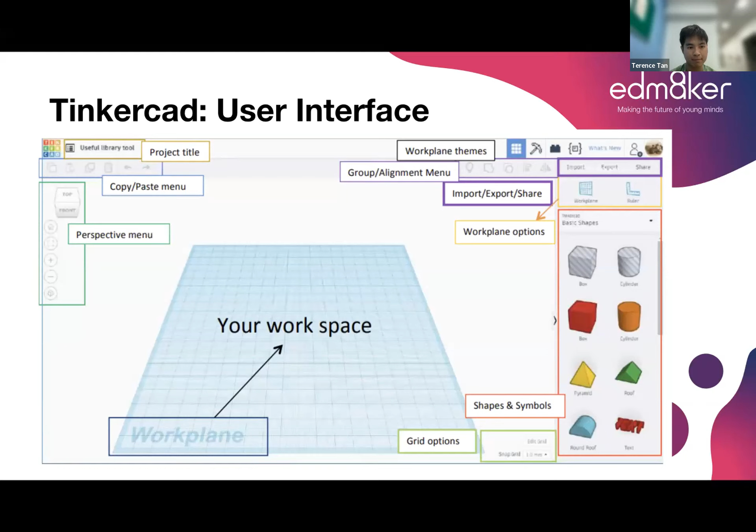Okay, now I'm going to show everyone how to create simple objects in TinkerCAD. ได้เป็นการแสดงเครื่องมือง่ายๆนะครับในการใช้งานนะครับ On the right hand side of the screen, you can see different shapes. I'm going to pull a shape called the box into the screen. ดึงมาเลยครับลากมาวางได้เลยนะครับ

When I pull the box onto the screen, you can see that a box also appears on the work plane. I can zoom into the work plane using my mouse wheel or trackpad if I'm using a laptop. สามารถขยายได้ครับให้มันใหญ่ได้ครับโดยการใช้เมาส์ของเราครับ I'm able to also rotate my view of the plane by pressing Control and then scrolling. กดปุ่ม Control สามารถหมุนได้ครับ ถ้าเรากดปุ่ม Control ครับ

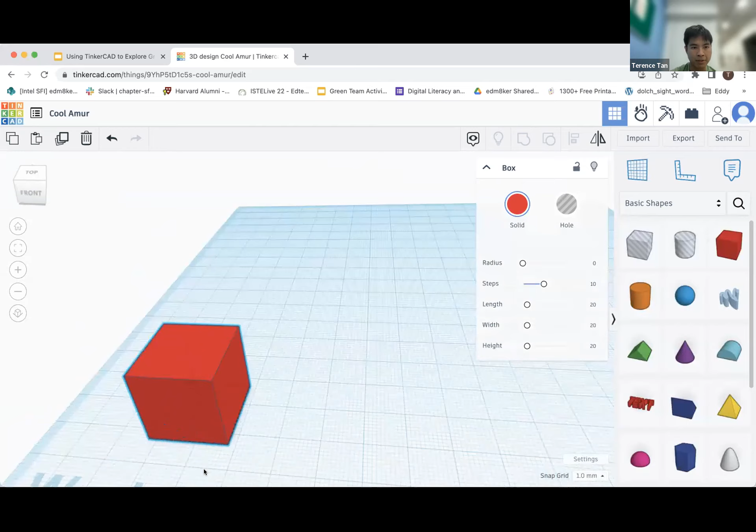Doing so allows me to see the object from different perspectives - from on top, the side, and even the bottom. สามารถเห็นได้หลายมุมมองด้านข้างก็ได้ด้านบนก็ได้นะครับ ดูได้หลายมุมมองเลยครับ This is very important when you're working with three-dimensional objects. อันนี้เป็นสิ่งสำคัญในการดูของ 3D นะครับ

Now I'm going to share how to resize - I call this the 3 R's: resize, rotate, and raise. First, resize. If you see one of these 4 squares, you can grab onto them and change the dimensions. เราสามารถขยายได้เลยนะครับตรงนี้ครับ You can also key in numbers to change the size of the square, for example if I put in 50. หรือว่าใส่หมายเลขไปเลยก็ได้นะครับ ใส่เป็นตัวเลขไปเลยก็ได้

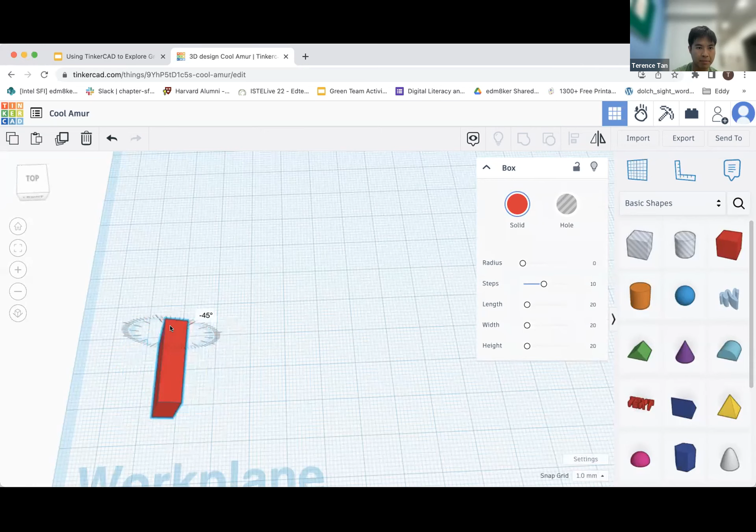Next, rotate. I can rotate the square amongst all axes - I can rotate it this way. สามารถหมุนด้วยก็ได้นะครับ I can also rotate it this way. หมุนเป็นแนวนอนแนวตั้งก็ได้ครับหรือว่าหมุนเป็นวงกลมอย่างเมื่อกี้ก็ได้ครับ Sometimes you may need to rotate your perspective by pressing Control and pivoting before you can rotate or resize the object.

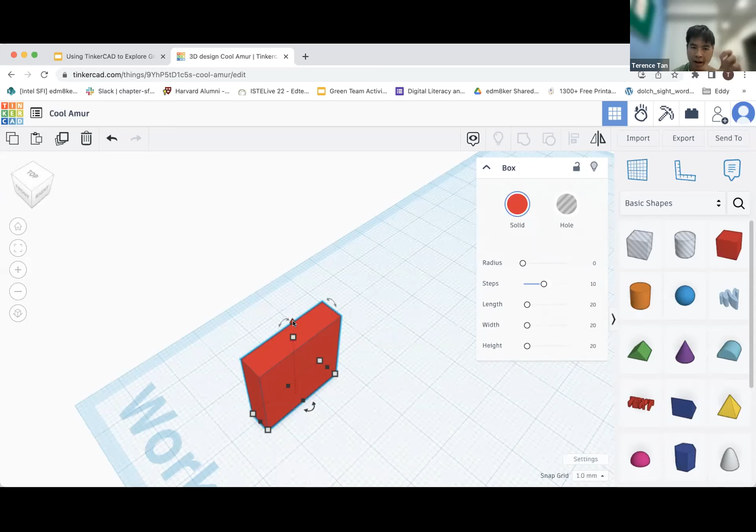I'm going to give everyone a few moments to play around with the 3 R's. Pull a cube, a box, into the workspace and try to rotate, resize, as well as raise. The raising is the last one I haven't mentioned - to raise the object, there's a little cone at the top. You can pull the cone, and this raises or lowers the block from the workspace. ครับตอนนี้อาจารย์ก็จะให้เราดึงตัวกล่องลงมาในพื้นที่ในการทำงานนะครับ แล้วให้เราลองปรับขนาด หมุน ยกขึ้นยกลงที่อาจารย์บอกนะครับ เดี๋ยวอาจารย์ก็จะให้เวลาเราในการทำนะครับ

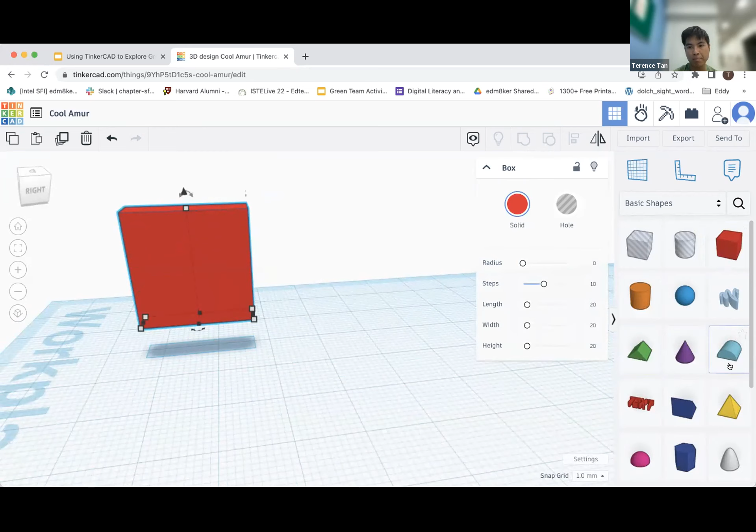Now I'm going to give everyone a few minutes to pull a block onto the workspace. It can be any shape that you choose. Try resizing, rotating, as well as raising the object.

How to know about the size on the tool menu? Oh, tool menu, okay.

You can click one of the corners and it will give you the sizes. Is it centimeters or feet? Currently it's in millimeters, but you can change the dimensions at the bottom over there.

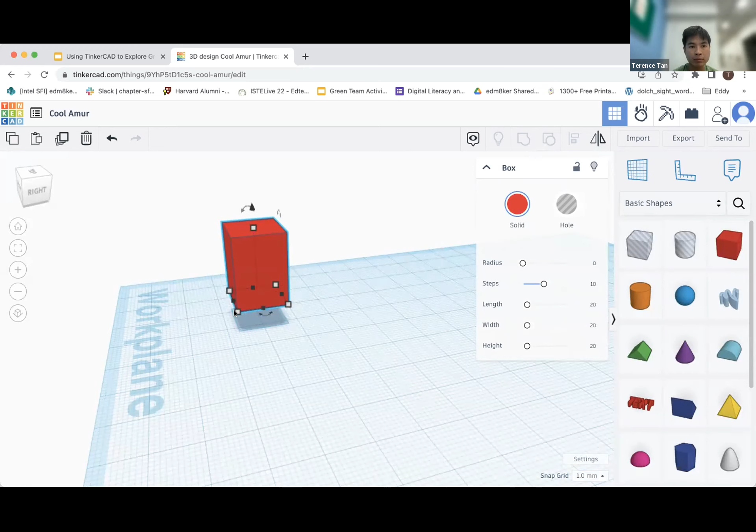Can we randomly select one of the participants to show their work? Maybe we can have a volunteer show their work and how they resize it. We'll give about 3 minutes to share on the screen.

Kru Tong, I'll leave it to you to decide when might be best for people to volunteer. Or do you think they are okay to share now? I think they are okay, I think they are ready. So can we have a volunteer?

I have a volunteer in mind. He is the best participant ever, he joined our workshop every Saturday. Kru, are you ready?

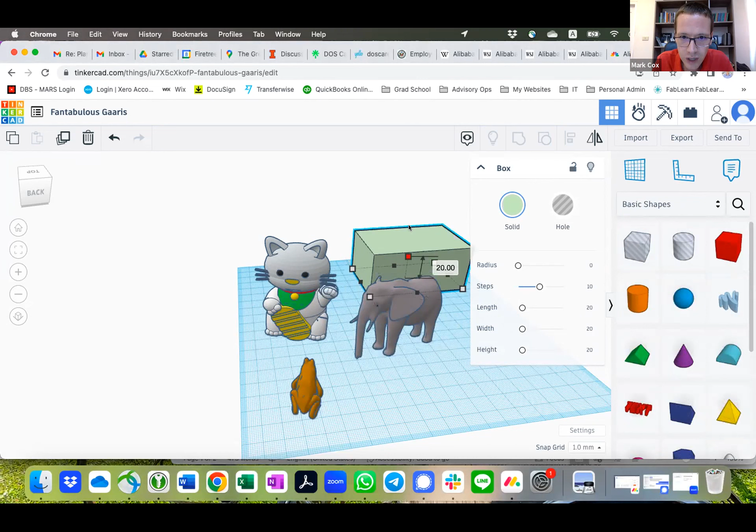So I went to more shapes. I saw over in the corner basic shapes and other things, so I started with this square. I was able to change the shape, make it higher, resize it, move it around, and also change the color.

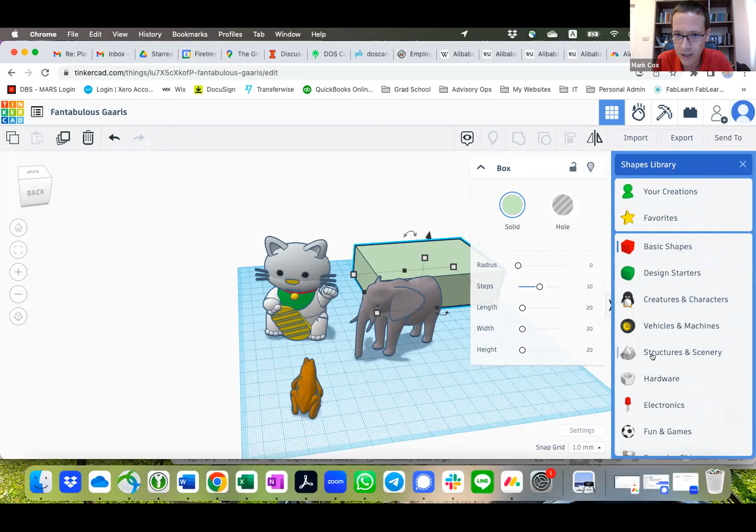I chose an elephant, and it started very, very large when you first choose it. So I changed the shape a little, changed the shape of the cat just to play around. Yeah, so there's my example.

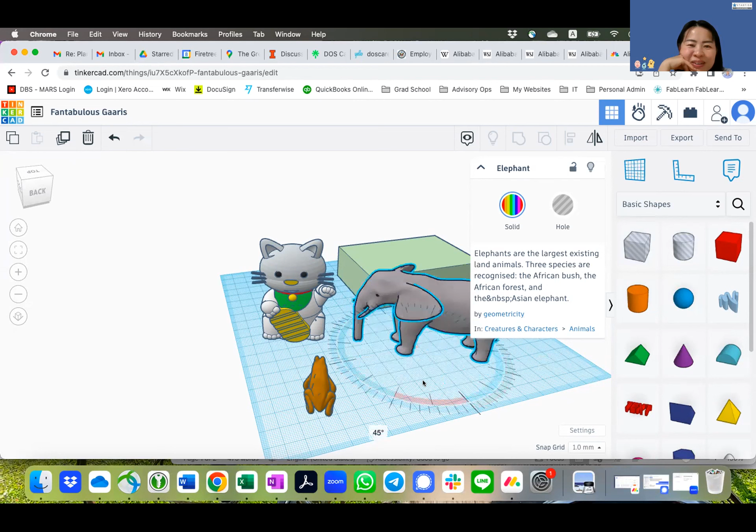Can Mark rotate the object? Can he rotate the elephant? Yes, let me choose—I think you press this little red arrow to rotate it. Wow, exactly. Can Mark lift it up and down?

They wanted to know, can I lift it? Mark clicks the cone, that's right, that's the cone—raise it up. If you click on it, you can lift it, and you can even put it down below the plane for the elephant to go down. Let me rotate or change my perspective... yeah, look at that, now the elephant is below the plane. So that little arrow right there, that makes it lift.

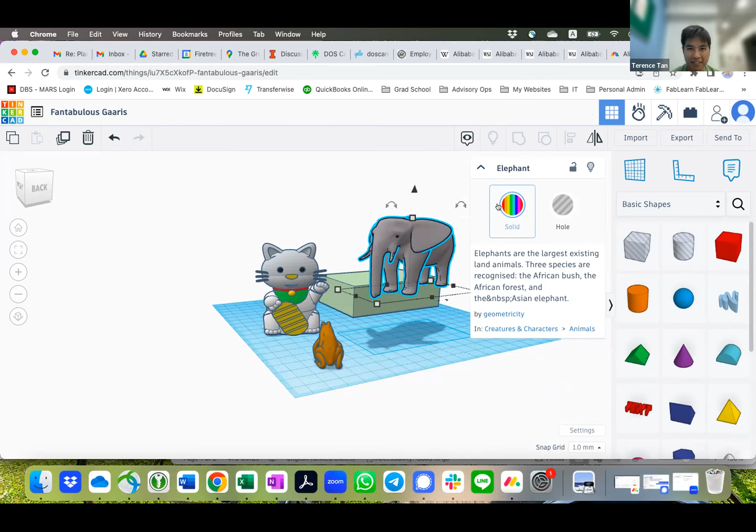I think we have a question on changing the color. Currently, Mark, if you click on the color, what can you see? For the animal, there are many different kinds here.

So let's change it to purple—yeah, you can change it to a purple elephant. And change it to gray, green, orange. There you go. It has a shadow too, that's nice, kids will love it.

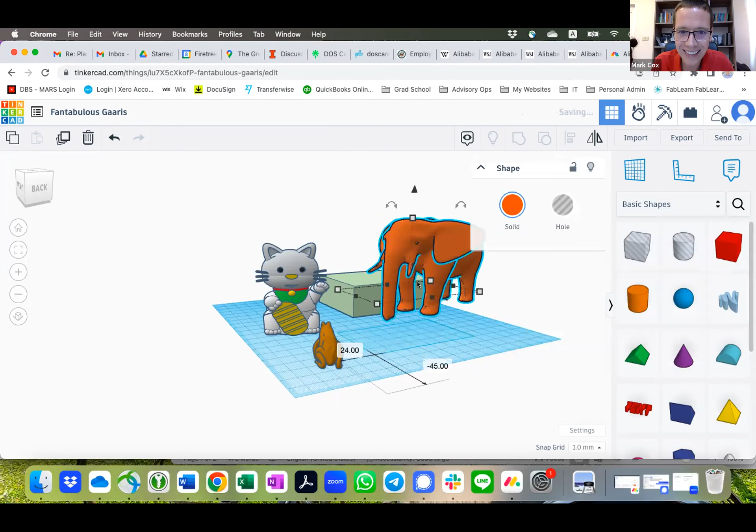Thank you, Mark, very wonderful. We have a question on the tool for the group of people. What does that mean? I just want to make sure I get all the questions.

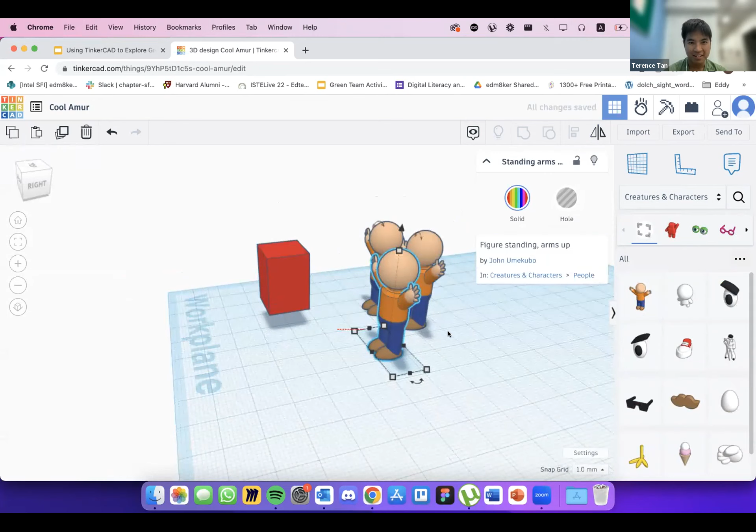How to group different things, right? So let's say I have three men. Oops, one moment, rotate, I deleted my block. I select by dragging and do a lasso, I click this one, group—and now I can treat all of them as the same. If I want to make them taller I can, shorter like dwarfs, or you can raise them above and below the plane. I hope that answers the question.

Okay, so now I'm going to spend a bit more time talking about more advanced concepts. I'm going to discuss duplicating, grouping, and aligning.

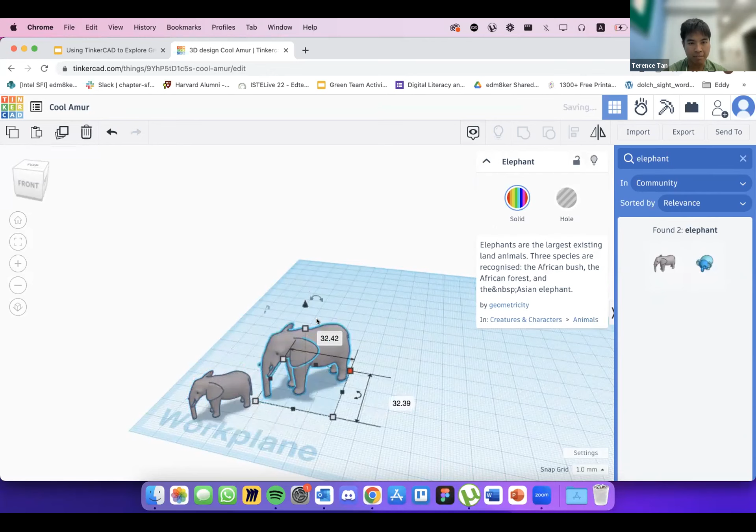Duplicating helps to maintain the changes that you just made. Let me give an example. If I duplicate the elephant by pressing Ctrl D, or Command D if you're using a Mac, I can make the elephant bigger, and then every time I press Ctrl D, it becomes bigger and bigger.

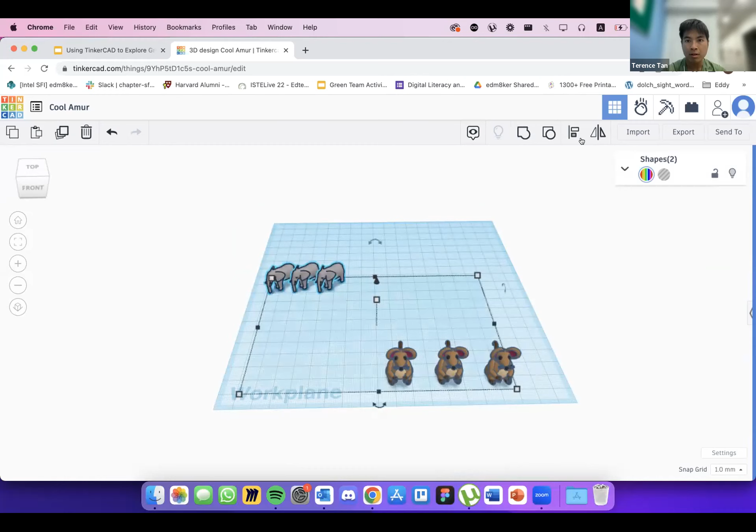I can select everything, and then I can click align and make sure that everything is aligned at the bottom, or on the top.

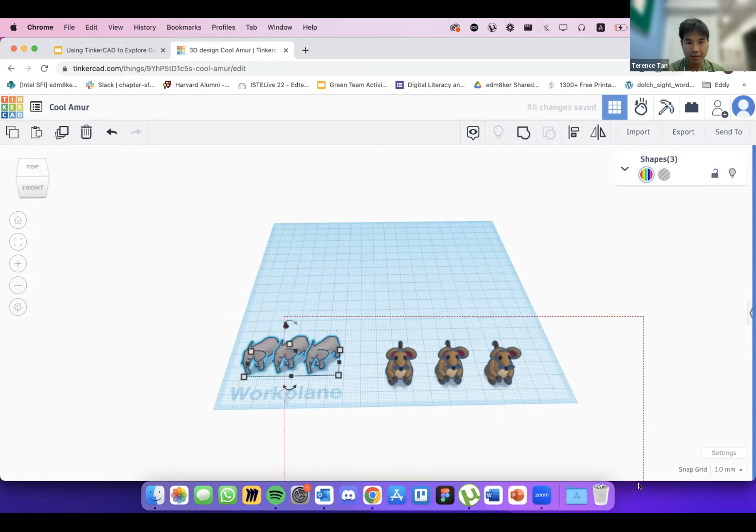Now that we have this, the last thing I want to teach, which is a little bit more advanced: let's say I only want the head of the elephant. I'm going to grow this elephant a little bit more. Let's say I only want the head, I don't want the body. I can actually hollow out the head of the elephant. How do I do this?

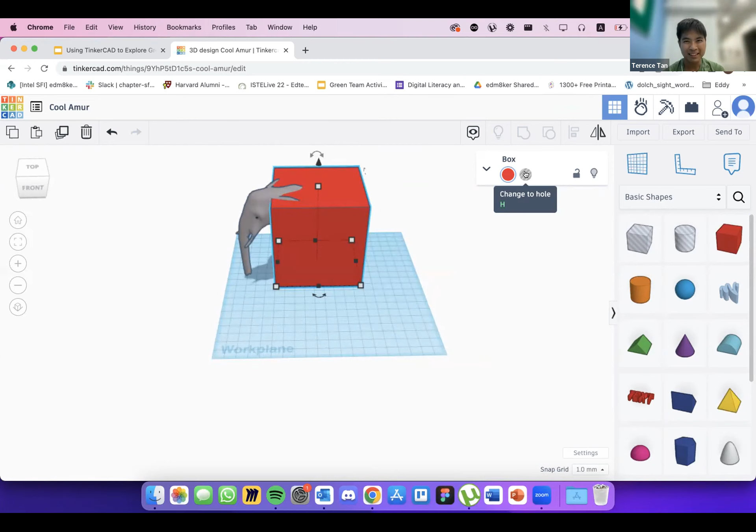It will cover an elephant, I think. Let's see. Okay, so let's say the elephant is currently in the box, but it's not hollowed out yet. What we have to do is select both and then click on group.

So now we have an elephant whose head is showing, but its backside, its butt, is still showing. So I want to make the cube, I want to click and ungroup, and make sure that the cube is actually covering its tail.

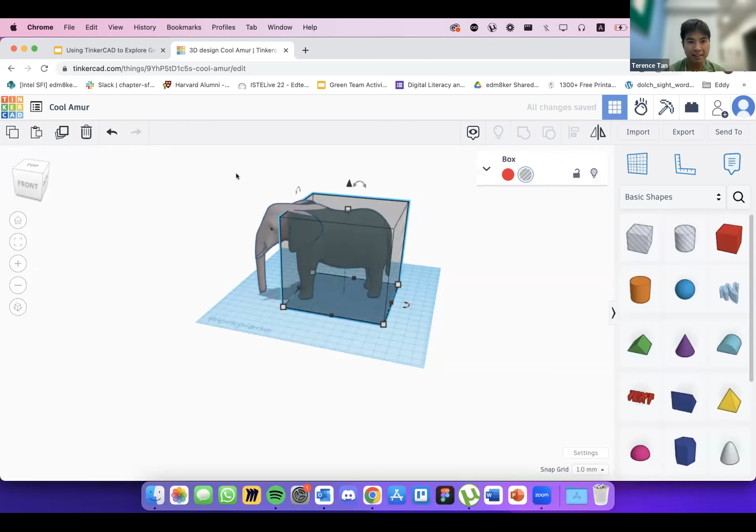So I click on the cube, I make sure the cube is covering its butt, I select both, and I click on group.

Now you see that as a result, the elephant only has a head. And this is interesting, because that means you can pick another animal and give it the head of an elephant, but the body of, say, a lion.

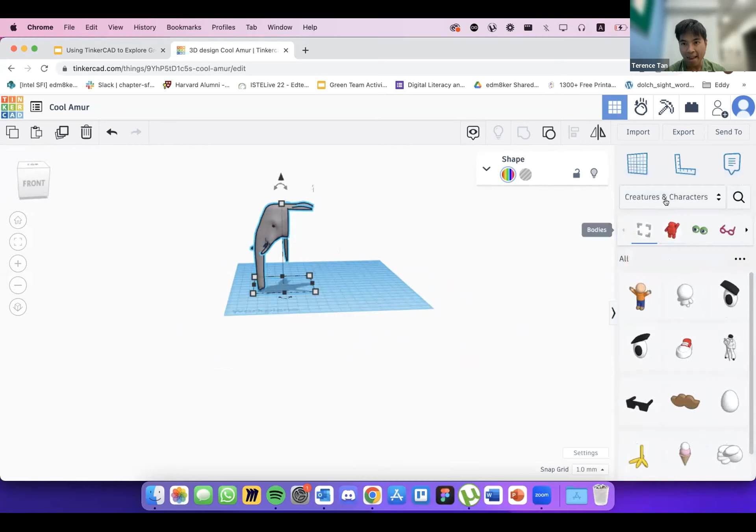Could you please try again with the lion? Sure. So now let's say I want to do the opposite: I want to keep the body of the lion, but I don't want its head. So I want to take its head off.

Basic shapes: pull a basic shape in. Now I have to think, what shape best will cover the lion's head? I think that more than a cube, a cylinder may cover the head better.

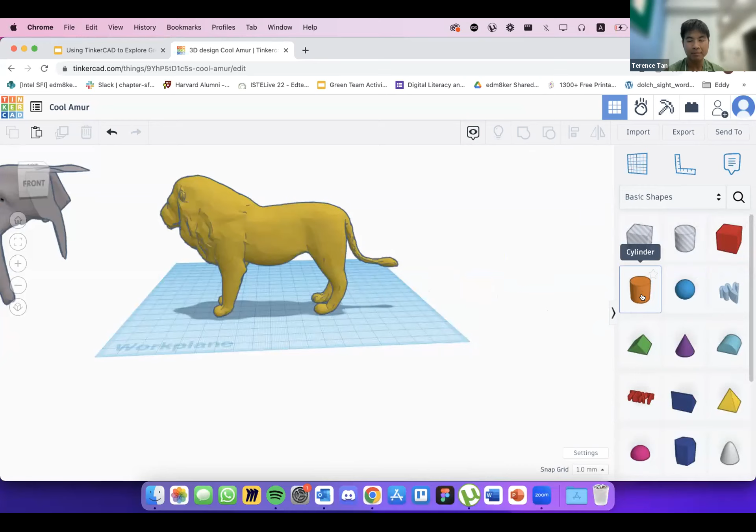So because of that, I am going to create a cylinder. I'm going to rotate the cylinder a little bit, and I'm going to make the cylinder dimensions more accurately represent the lion's head. Oh, sorry.

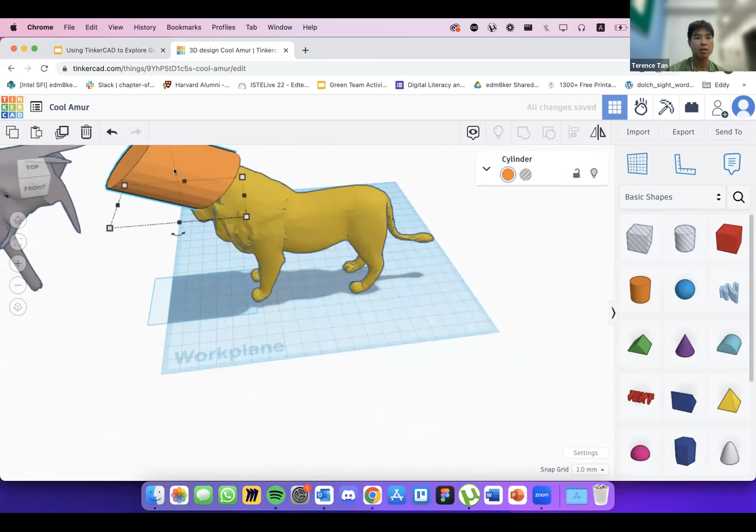We also want to make sure it's accurately covering the lion's head from all around.

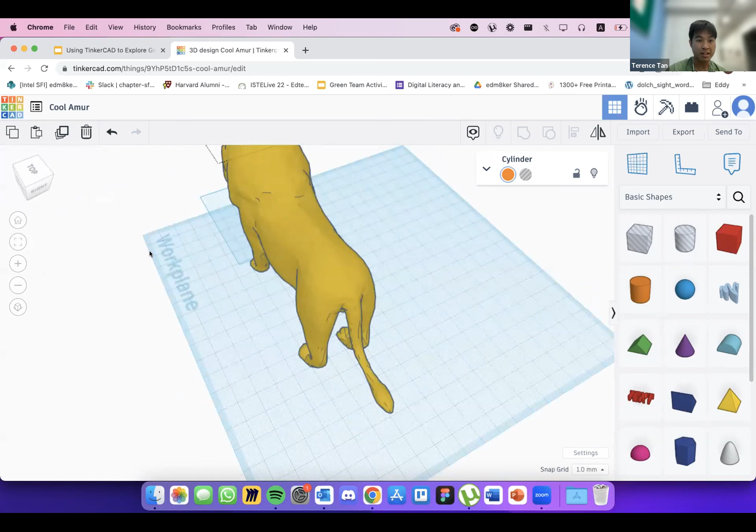So this is going to take a little bit of patience.

If you are confused, you can always go back to the home view by clicking home. Now I'm going to do the opposite. I'm going to make it such that the cylinder is fixed, and I'm going to move the lion. I'm going to fix the cylinder and move the lion's head instead. If we want to know whether it's covered yet, we can move the lion to see if the cylinder we created fits the lion properly, and we can adjust the lion to check.

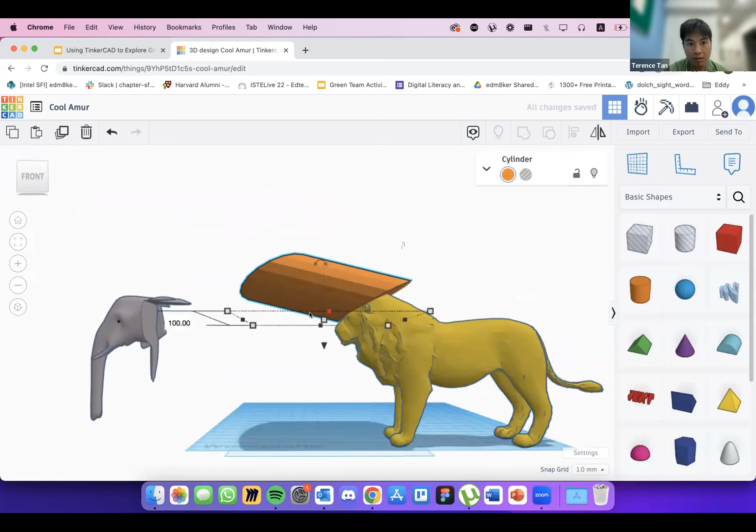Okay, I think we're almost there. So we got it, now we see that the lion's head is totally in the cylinder. This should be okay now, see from all dimensions to make sure the lion's head is stuck in the cylinder.

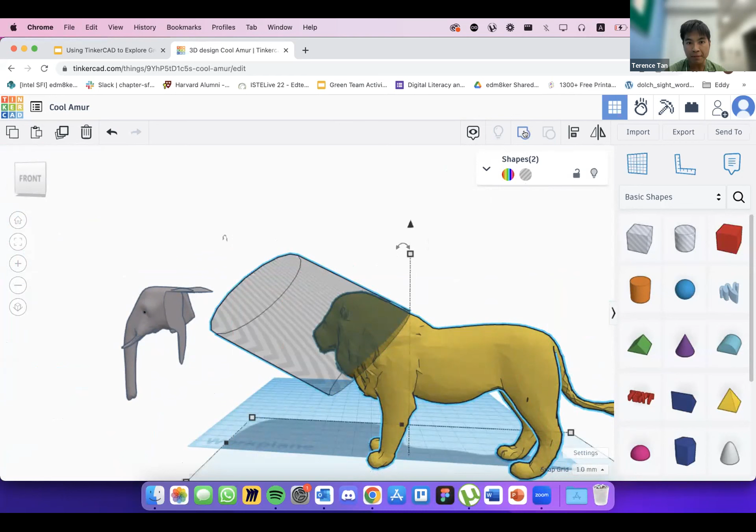The lion's head is now stuck inside the box. Change the cylinder to a hole - press the cylinder to a hole button. Select both the cylinder and the lion, then we group it. Press group, and now we have a headless lion.

And now, it's not perfect, but we have something that looks like an elephant's head on top of a lion. This might not be too pretty, but the head is an elephant and the body is a lion.

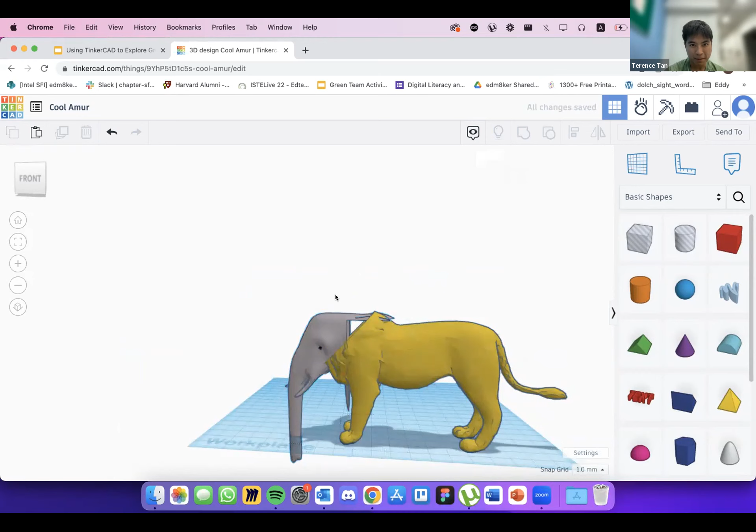And the beauty of this is that with a 3D printer, a student can actually print these objects or these creations. So it can be turned into a 3D print - this can be 3D printed directly. There you have it.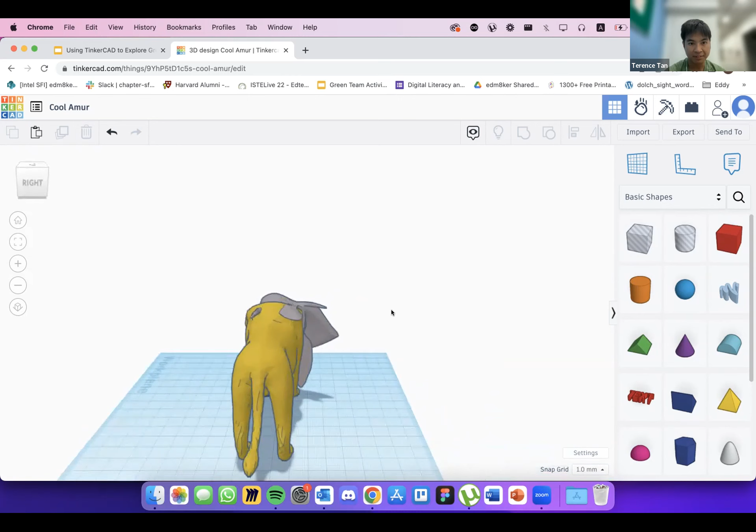At this point, I wonder if there are any questions. Is there any question here? Did everyone follow along here?

If you followed along, press 1 for me please. Teacher, do you have any questions? Can you explain again the part where it cuts the neck? Sorry, I need to step away from my laptop for a while. Can you give me 1 minute? I'll be back in like 30 seconds. Sorry about that, okay, yeah.

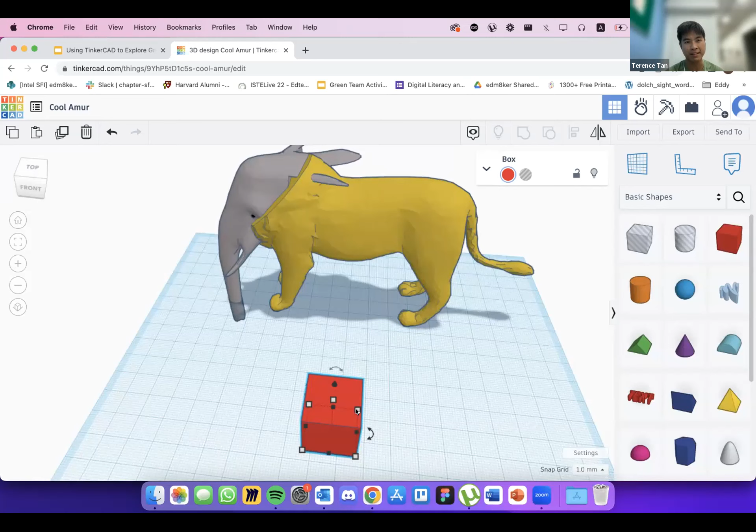Hi Terence, they were just asking to go over the cutting option again, so I was explaining: you get a basic shape and put it where you want to cut, then you change the color to the gray lines - the hole option there next to the red - and then the third step is to press the group button, is that right? That's correct, exactly. And I was saying that this is a little bit more tricky, so I'm happy to go through a couple more times with simpler objects. Sure, okay yeah, teacher Terence will do another example to show everyone. Thank you.

So we have 2 objects here - okay, no more lion, no more elephant. We have a cube and a cylinder, right? Let's say we want to create a cube that has a hollow center. How do you think we can do it? Does anyone have any suggestions what they can do? Try telling me how we can do this - we have one box, a square box, and a cylinder, so what do we do next? Can any teacher tell me?

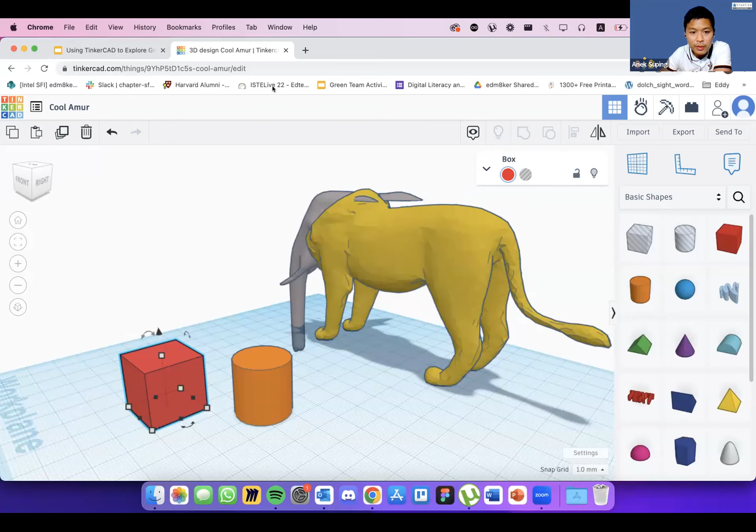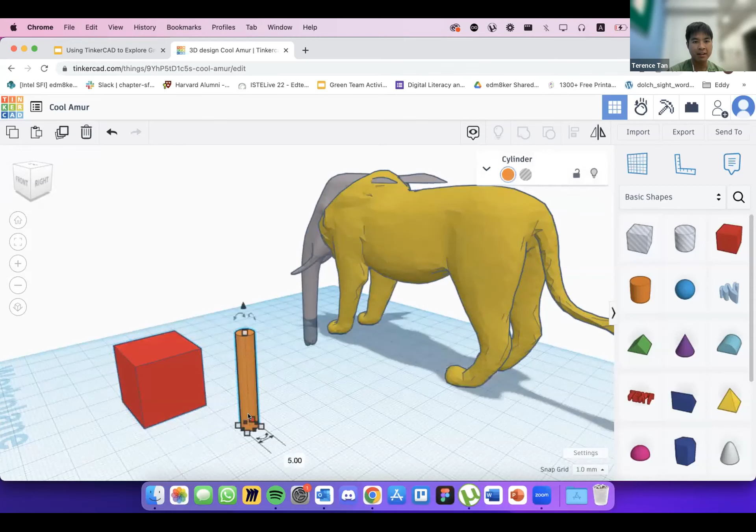Terence is asking: if you want to have empty space inside the square, how do you do it - like a big hole if you want to have a big hole in the cube, how do you do it? If you want to have a rod inside the square, how? We have to put the rod into the square, right? You have to put the cylinder into the cube, right? But we have to resize it bigger to cover, right? That's right. So how do I put the cylinder in the cube, right in the center, right? Instead of trying to figure out - it's so hard to place - I can select both, align, center. So select both, then go to align, select center, and it will go right to the middle.

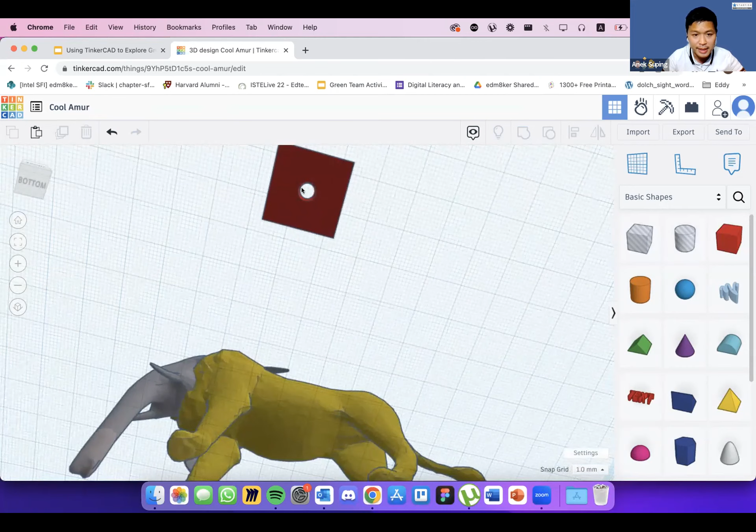Now what I'll do, as Kutong and Mark mentioned, is click the cylinder and change it to a hole - go to change to a hole, turn it into a hole. Changing to a hole means it will be the negative. It's a negative, and then I select both and click on group - press the group button. Now, if I 3D print this, I will 3D print a single cube with a hole in the middle. See? You can even see it - this is the drilling, this is making it have a hole in the middle.

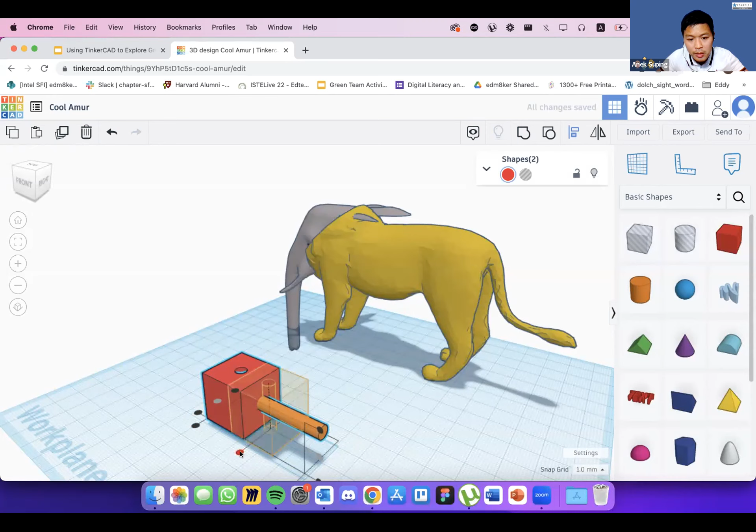I can even create a second hole along the other side of the cube. Let's see how I can do this - now I'll make a hole in the middle. I'll rotate the cube, change the dimensions to 5. Oh no - adjust the size. Then I select both and try to align them again, and place it in the middle. After I align, I realize that now my rod is in the middle of the cube.

I click on this, change it to a hole - turn it into a hole, press the button to make it a hole, and cover it again. Select all and then group it again - group them together again. And now my cube has 2 holes. Now there are 2 holes - this is the last tool, the drilling tool.

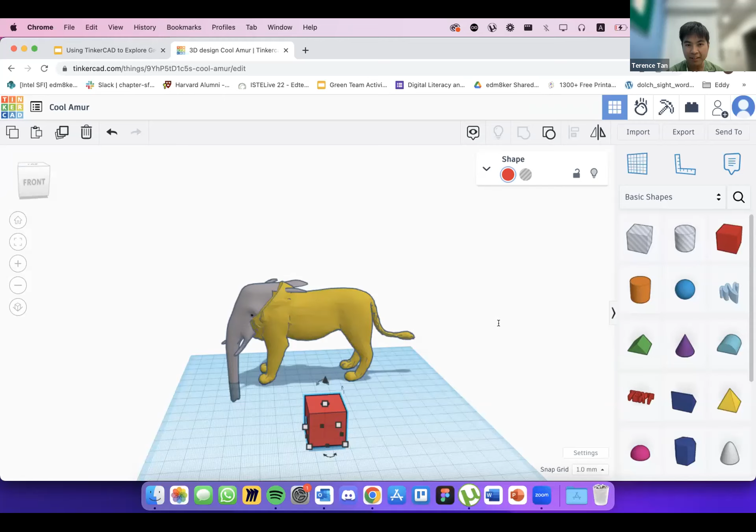The hole at the square. Okay. Does anyone have any questions?

It might be challenging because this is a 3D representation, whereas most of us only think of designing in 2 dimensions. So it's very common to face a steep learning curve, but once you are more comfortable with it, you realize it's a very powerful design tool.

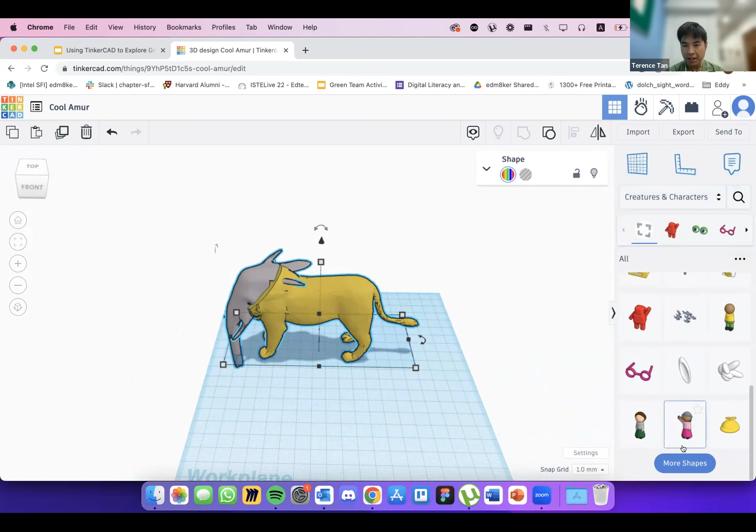You can also pick different items from the site. For example, apart from animals, you can even pick things like a Christmas tree.

So students can design how high they want the Christmas tree to be, for example, and if they want to put presents around the Christmas tree, they can put presents around it. Okay, so TinkerCAD has those functionalities.

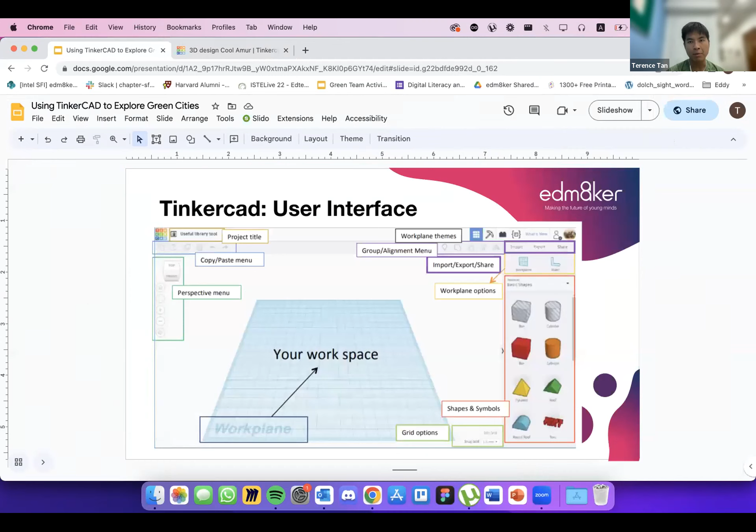Now, what I will be talking about for the next around half an hour, to have time to create a flag. Okay, so now I'm going to ask everyone to do some basic design in TinkerCAD, right?

I have created a Singapore flag. Because I'm from Singapore, I created a Singapore flag.

So my challenge for everyone is to create a Thai flag using TinkerCAD. I'm going to show you my Singapore flag, and then my challenge is for everyone to create a flag of Thailand in TinkerCAD.

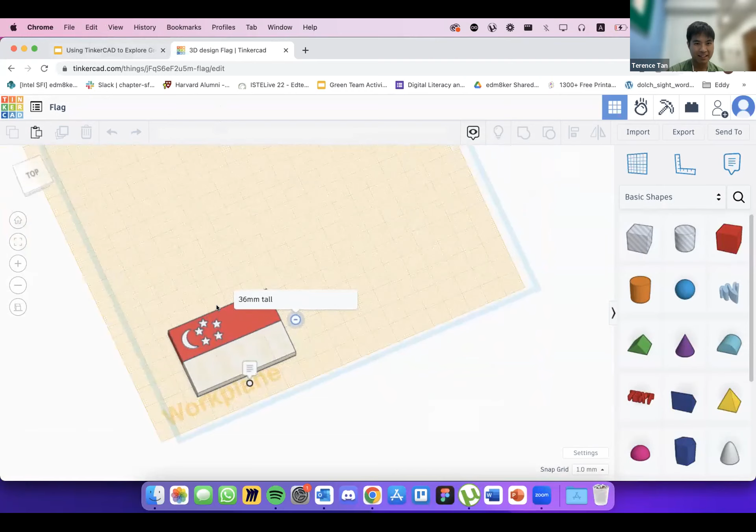Okay, here's my Singapore flag. Now I will give you the dimensions of the Thai flag, and I'm going to challenge everyone to spend maybe the next 10 minutes designing your own flag.

It doesn't have to be of Thailand, this is just a suggestion. If you want to design something else, you can do that too. But after this, maybe we can have 1 or 2 people share their creations using TinkerCAD before we move on to the next part of the workshop.

10 minutes for creating a flag, any flag or just the Thai flag? Any flag, okay, any flag. Or anything, a flag or else.

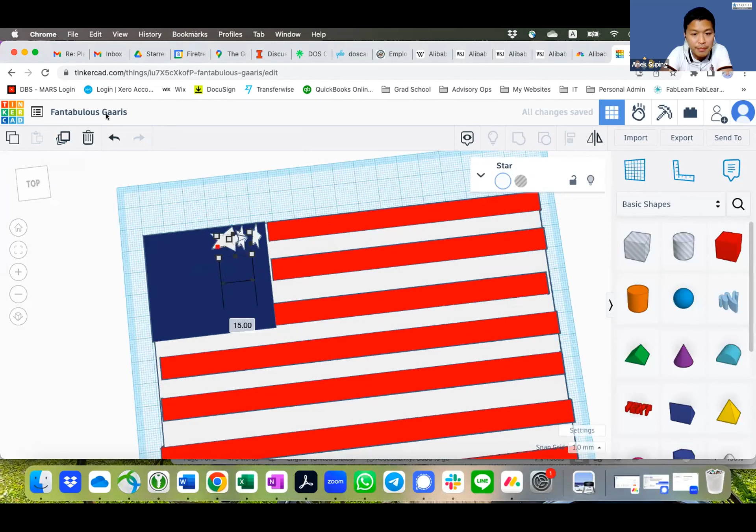You click duplicate, right? Yeah, duplicate. Then you click the duplicated file and move it. Need to zoom in more, I think, probably easier. Okay, and then duplicate, then you click on the new file you just duplicated, and Control D again. Oh okay, so let me choose the new one here. Duplicate, and then choose the new one.

And then Control D. I think I did it wrong, but okay, maybe I can show again. I'll try, because this is actually hard to describe too. Let's see if I can do it.

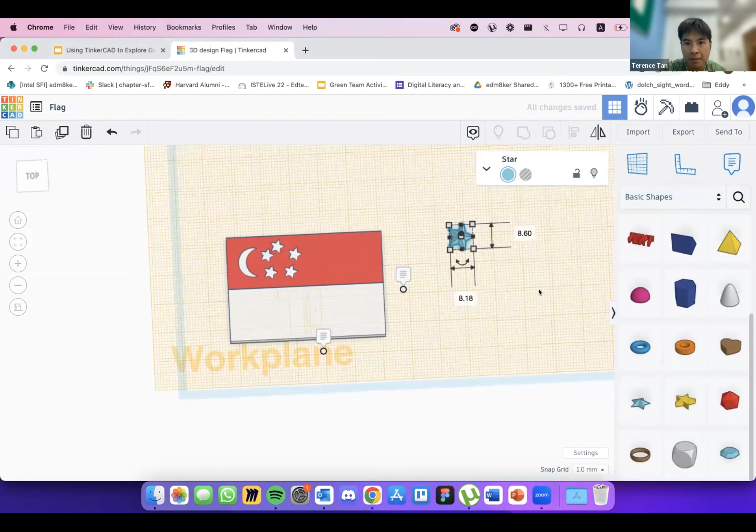I want to have 50 stars in rows. Okay, how will I do it? Basic shapes, drag a star in. This will create 50 stars for us. The method is to choose one shape first, the shape we want to create.

Duplicate, drag it. Press duplicate for a new file. Duplicate again and again and again, and then you get a row of stars. Again, duplicate, duplicate. The duplicated file sits on top of the old one.

You drag it, let go of the new file. Duplicate, duplicate, duplicate. Well, I guess I could have done it if I had known. No, but it's tricky, the duplicating thing took me a while too. I mean, it's common, this is a common thing I was grappling with when I first learned TinkerCAD as well.

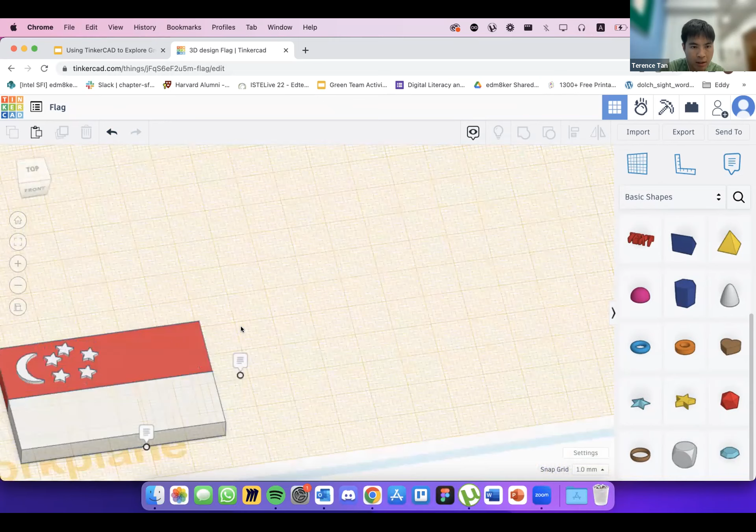Sure, this would be really fun for teachers and students during computer time. I think students would learn much faster than the teachers, just given how kids are with technology, being able to find out all the different functions and how to do things.

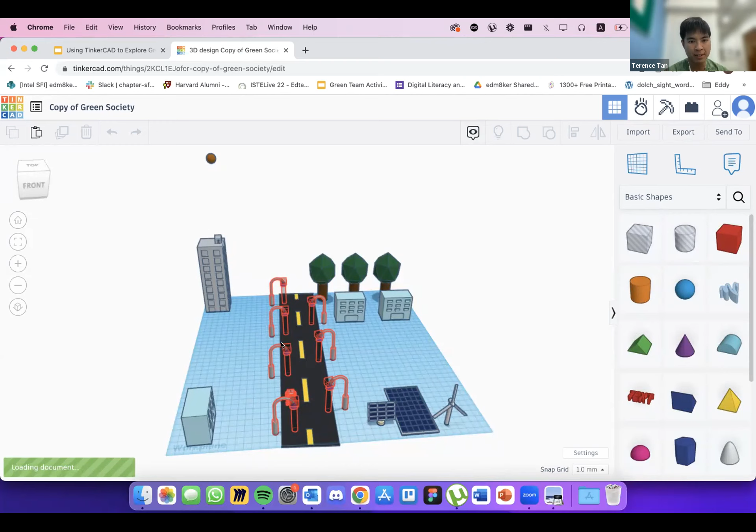If you see your shapes having a red outline around them, it means TinkerCAD is still loading, so you shouldn't touch them or you'll get an error message. In this case, my lampposts are still loading. We can see it's loading underneath—right now we can't do anything, we have to wait for it to finish loading first.

There are a few features on this design. We have solar panels, a windmill or wind farm, a road, lights, a car, trees, as well as apartment buildings. We can see there's a windmill, solar panels, and buildings.

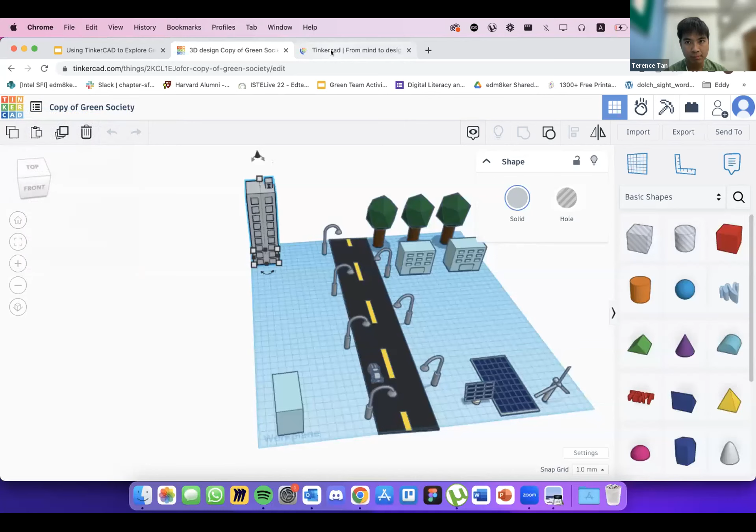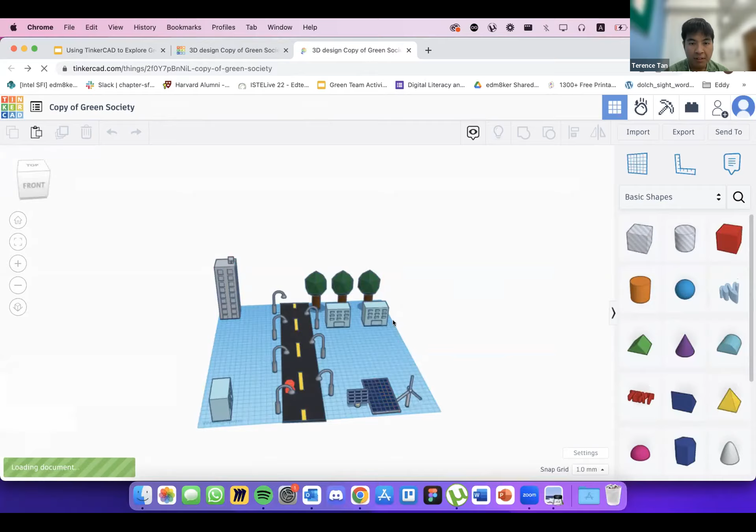So just now when I was playing around with this copy, what I did was try to wait till it loads. Never mind, I'll redo it here. What I wanted to do was, some students may want to create a river around the city, and build their city around the river. So what I did was...

You can create your own shape by drawing what looks like a river, and let's say I want to make it a little bit fatter—like Chao Phraya. Many cities around the world are built around rivers. Then I click on done, and now I have a small river. Let's say I want to make it bigger and fatter.

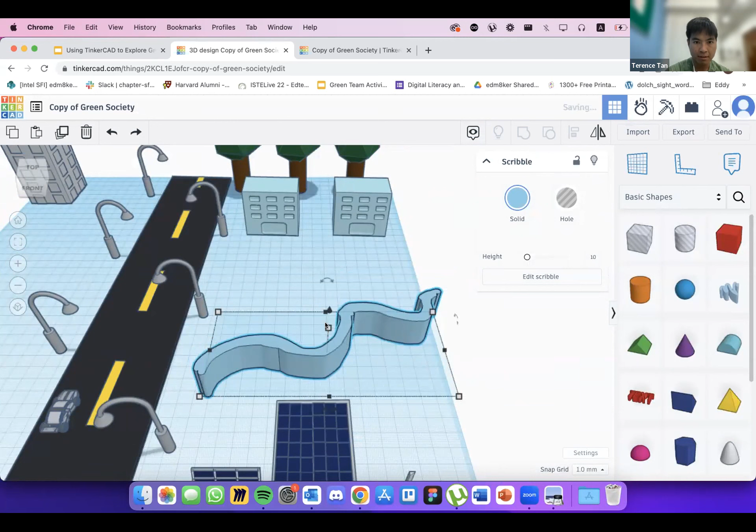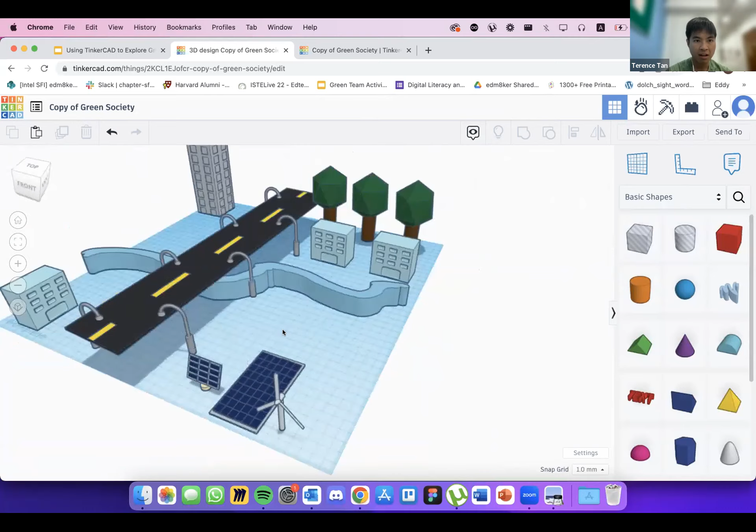So I can build a river that goes around my city, and I can make the road higher so that it goes on top of the river, like how many cities are gradually building their roads on top of water features and rivers. After the teacher finishes making the river, he raises the road higher than the river. But there are a couple of things wrong.

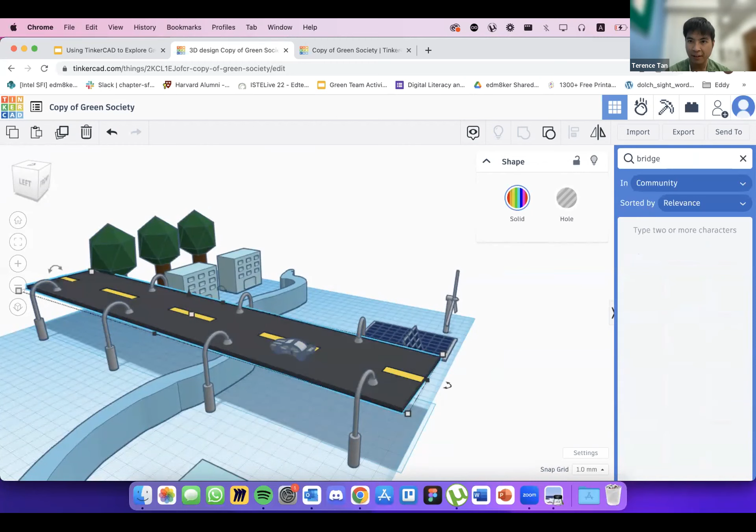Firstly, my car is under the road, so I need to bring it on top too. Secondly, my bridge doesn't have little supports, so I can search for bridge supports, drag them in, and they go under my bridge. I can copy and put it at the other end.

Then I will make my river a little less high, so that I can also lower my road.

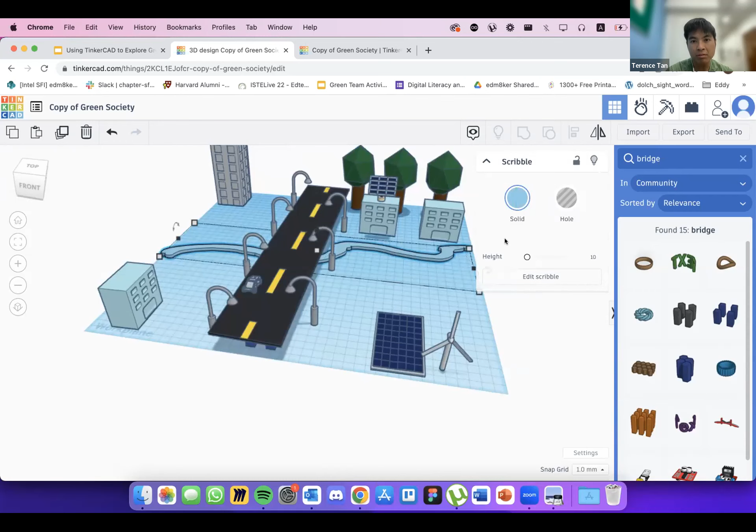Oh, can we? No, because it's supposed to be a 3D design, right? So what you can do is make the height lower so that it's a river that doesn't have a lot of height, but you can't delete the actual borders.

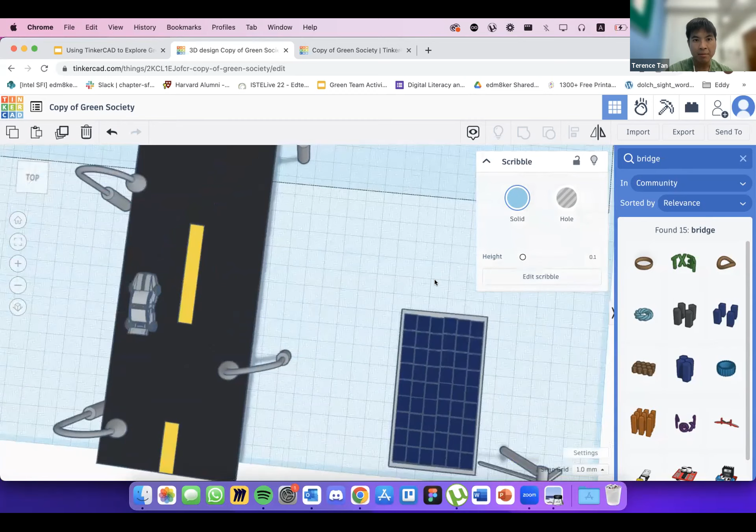Like I mentioned, TinkerCAD doesn't allow for the deletion of borders, because the main reason TinkerCAD was designed is to create 3D models. So the borders are necessary to outline the 3D models.

The answer is, if we print it out on a 3D printer, does it still have the edge of the river? Correct. ก็ Correct. ยังไงถ้าเราปริ้นมาเราก็ต้องเจอขอบอยู่ดีนะครับถ้าเราปริ้นมามันลบไม่ได้ครับขอบอะครับคุณครูครับ

Right. ขอบคุณค่ะ No problem. Yeah.

I can also create another road that runs along. Oh sorry, I can create another road. Okay, and I want to rotate this road.

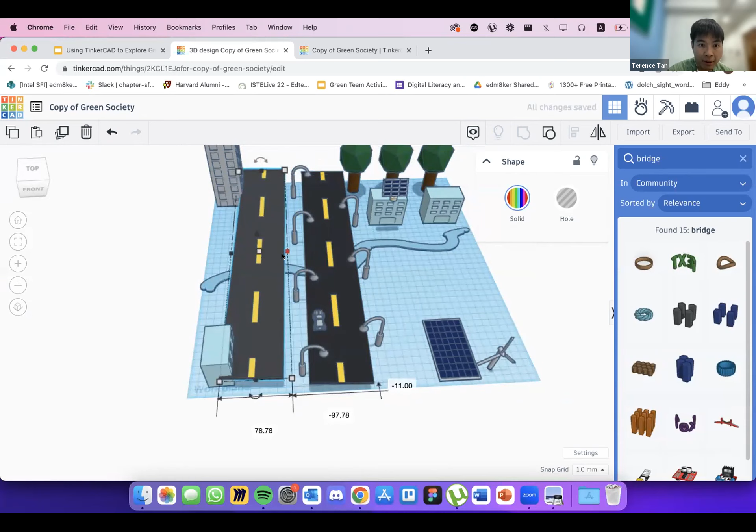Sorry. And do I? Sorry.

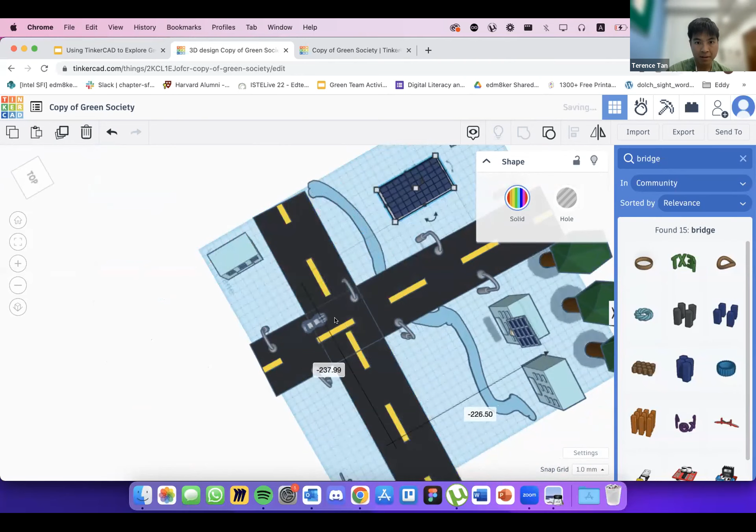Yeah, I can rotate this road to run perpendicularly and below the original road. This helps students understand how it's like to be a city planner, because this is a very real job that city planners have to do. They have to understand how roads can be built and things like that.

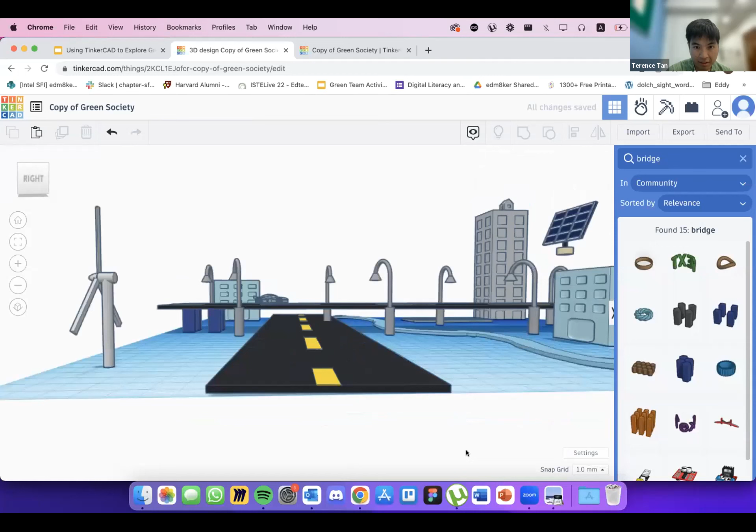Actually, this road is not perfectly aligned. อันนี้ก็จะเป็นการสอนให้นักเรียนเป็นนักวิศวกรเป็นนักออกแบบนะครับเป็นนักวางแผนที่ดีอะไรอย่างเงี้ยครับเนาะถ้านักเรียนสามารถออกแบบนี้ได้อย่างเงี้ยถนนแบบตัดกันอะไรอย่างเงี้ยครับแสดงว่าเขามีความคิดการคิดวิเคราะห์การคิดสร้างสรรค์อะไร

So something like this, right? There could be a road running below. I'm going to show you also some examples that other students have done - not our students, but students that attempted a similar activity. อาจารย์จะให้ดูตัวอย่างของนักเรียนนะครับแต่ไม่ใช่นักเรียนของอาจารย์นะครับ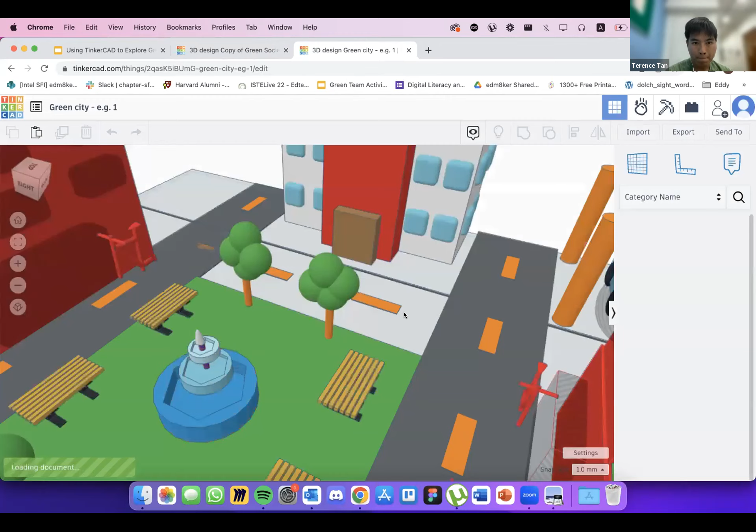In this example, a student has created a city. You see the central plaza in the middle with a fountain for people to gather. You see public utilities like a hospital, places of worship like a temple, buses, trees. So this is this student's representation of a green city.

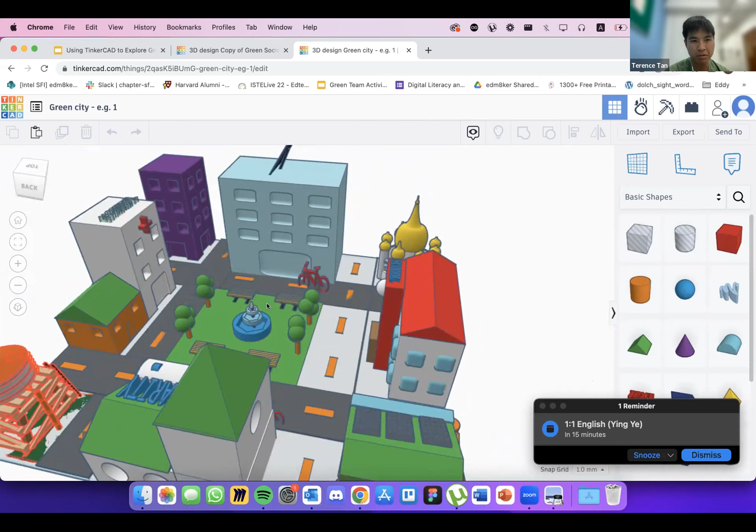The students created this themselves, around secondary school age, 12-13 years old. But the great thing is they don't have to create from scratch - anyone can access this because it's uploaded on TinkerCAD, and any files uploaded can be reused by anyone. It's like open source. ก็สิ่งของวัสดุต่างๆนี่ก็เอามาจาก TinkerCAD เลยนะครับก็จะมีปุ่มตรงนี้ครับ Basic Shape เนี่ยครับก็เอามาทำได้เลยครับอันนี้เด็กก็ออกแบบกันเองนะครับ To make it as a group work or individual.

I am not sure about this one. For us, when we did it in Singapore, we do it as group work, and we get the students to present. So it's not just about making the TinkerCAD model, it's also about presenting how it represents their vision of a green city.

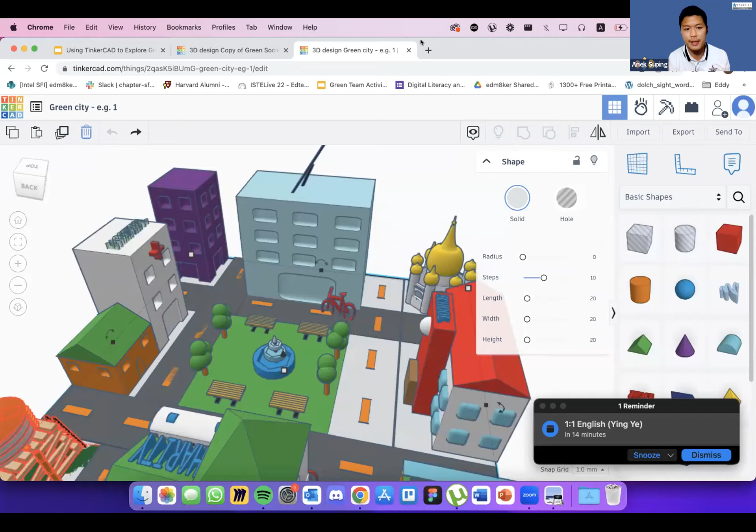When students are presenting, it's important to give them a structure for how the presentation should look, even though it's not in my main slide. In English, broadly we ask them to share the introduction, some context and the design inspiration, the design elements of the clean energy green city, the challenges they are facing, and the conclusion.

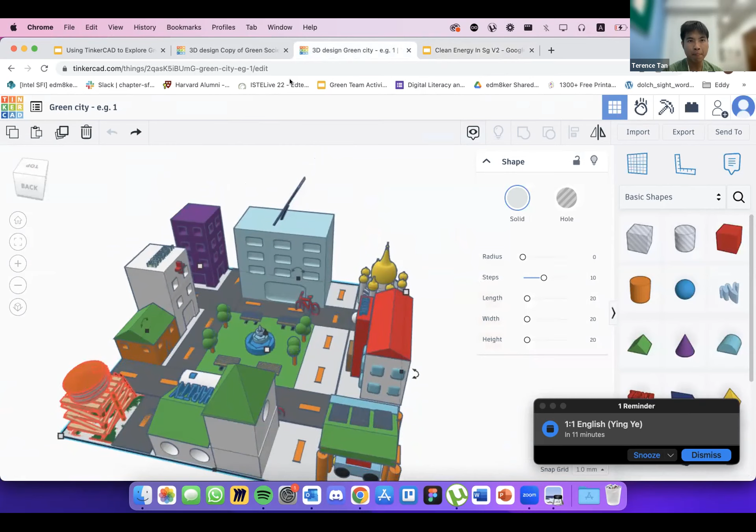So this is one example; I'm going to show a second example. This one is a little bit different - the student has obviously had more greenery, there's more forest area, and you can see there's a wind farm for producing electricity. Maybe he has a problem with Wi-Fi connection, Terence.

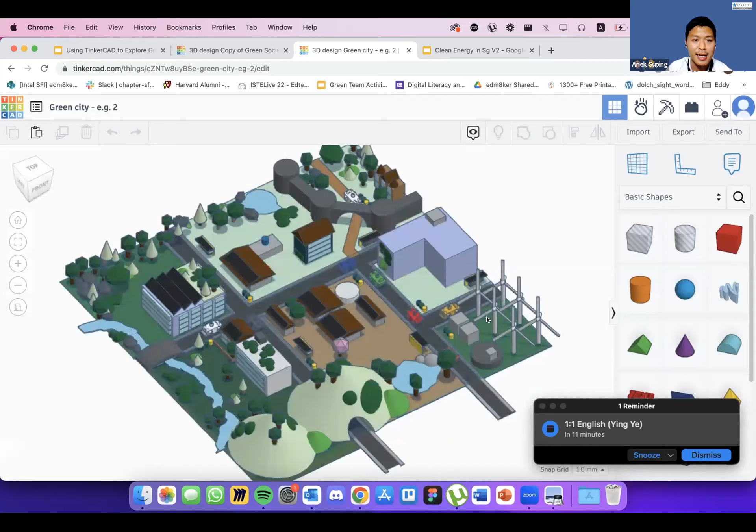But he got stuck with that. Wow, it's amazing. ครูเกียกต้องเอาไปสอนแล้วเนี่ยน่าจะหลุดนะครับพ่อจ๋าเอามาแล้วครับมาแล้วครับ โอเคค่ะ I'm so sorry, my Wi-Fi is just not great today, but yeah, good thing I'm back.

Did anyone see if I managed to show this before I disconnected? Okay, so this is another example of what students managed to do. It involves, like I said, a wind farm, a river running through the city, and a forested area similar to Benjakiti Park that I mentioned - a forested area within urbanization. The students were trying to represent that here too. อันนี้ก็จะเป็นตัวอย่างของเมืองที่เรียนออกแบบก็จะมีป่านะครับมีป่ามีแม่น้ำไหลเข้าสู่เมืองนะครับมีฟาร์มมีวินมิลมีเครื่องกังหันเนี่ยครับกังหันผลิตไฟฟ้าอย่างนี้ครับคือจะเป็นเมืองที่แบบว่าเป็นเมืองที่เป็นกรีนซิตี้ของจริงเลยครับเป็นเมืองสีเขียวเนี่ยครับที่เขาออกแบบมาบนข้อจำกัดที่ให้ว่าต้องทำแบบเป็นเมืองสีเขียวนะเนี่ยครับ